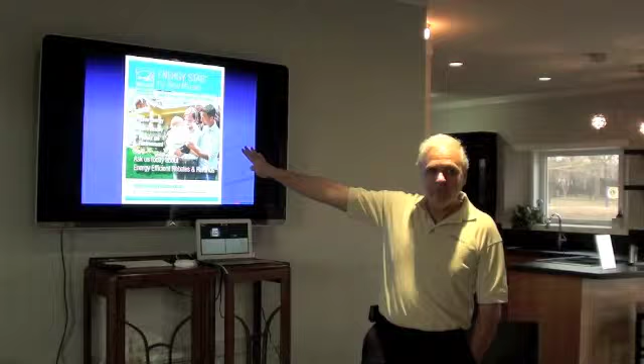We're going to talk about a few of the energy rating programs that are available throughout Canada, but more specifically in Saskatchewan. And what we're going to be talking about is the involvement of the federal and provincial government, and how they rate houses, how they audit the files, how they audit houses. The Sunridge Group is involved both in the retrofit area, retrofitting existing houses, but we're also involved in the new home side of things, and there's 3 different programs for new homes, which is what we're going to talk about tonight.

Later in May, there's going to be another session on the retrofit programs that are out there, so there'll be additional things that are going to concentrate on that. So if you've got an existing house and you want to bring it up to whatever levels you want, whether it be the equilibrium level, or just reducing energy bills, we'll talk about the programs and the incentives that are out there, and possibly by that point in time the election will be over and we'll know a little bit more about what the federal government is going to do in that vein. So we'll leave that open-ended for the time being.

About 10 or 20 years ago, the federal government, Natural Resources Canada, came up with the ERS system, the EnerGuide Rating System. That system is applicable to all types of housing, whether it's existing houses or new houses, and it rates houses on a scale from 0 to 100. Just because it's 0 to 100, it's not like grades in a school where 80% is good and 50% is failing. A very highly efficient new home would rate about 80 on that rating scale.

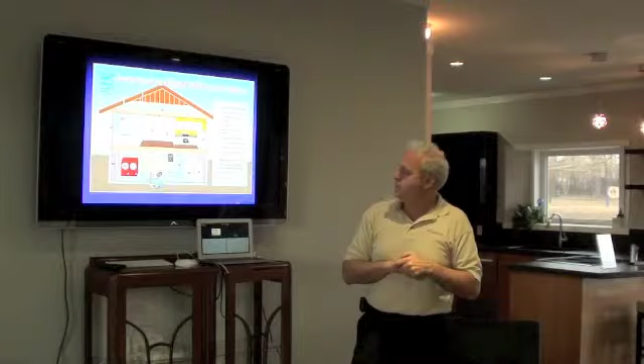Traditional housing typically has exhaust-only fans for ventilation. So they simply come on and they exhaust the stale air and they don't bring in any other air, and it's simply natural leakage where it leaks in all over the place and it's just a dead loss. So that's the heat recovery ventilator, and that typically is located in the basement. They are nice and quiet so that people tend to use them a lot more.

Rather than regular exhaust fans, most of us have the experience with exhaust-only fans in the bathroom. They don't move a lot of air, but they make a lot of noise. They're annoying, so people tend not to use them very much, and most of our homes are under-ventilated. Existing houses I'm talking about now. To retrofit an existing house with an HRV is not very easy, but to put it in a new house in the first place makes a whole lot of sense and is the right thing to be doing, because it's a very efficient and effective ventilation system with heat recovery as well.

The second item that's showing up on here is number 2, and that's the heating system. And again, if we look at a natural gas furnace, that's what most houses in Saskatchewan have, the condensing furnace. High efficiency ones are the ones that are available now. That's about as high as you can go, and they have efficiencies anywhere from about 90 to 96%. And then you can look at some other features with staged burners and high efficiency fans on them to distribute the energy around the house and that sort of thing.

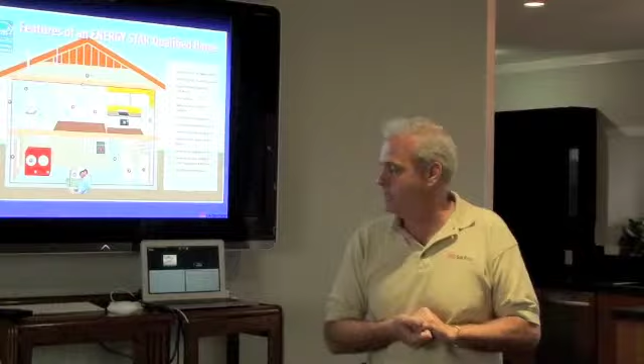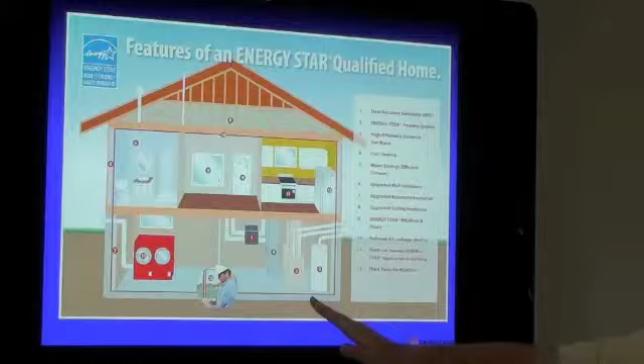This graphic here shows the water heater as being a tank style, and that's what most houses have. For the new housing programs, they need to be power vented or induced draft. That has some degree of safety to it because naturally aspirated water heaters can backdraft quite easily. If the house is under a negative pressure, the weak point is a chimney, and they can tend to backdraft and cause spillage quite easily. So induced draft or power venting are a minimum.

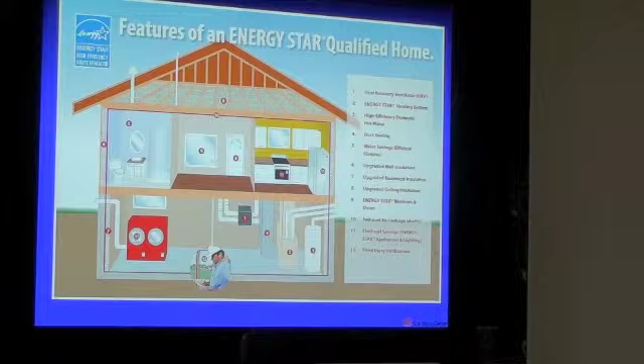Then you can also go to condensing tank water heaters. The next step up though is the tankless water heaters, and they can either be lower efficiency or condensing versions as well. And those tankless water heaters are anywhere from about 82 to about 95% efficient.

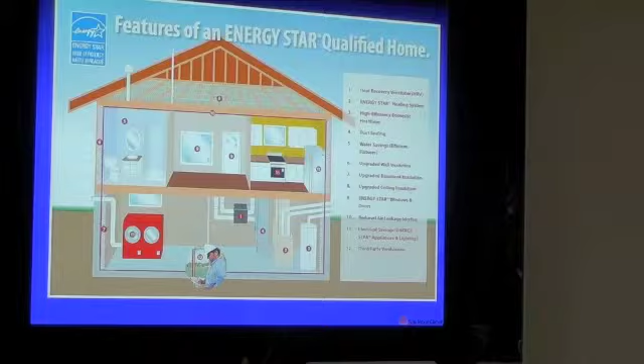Okay. Number 4 is duct sealing. Another feature of many of the new housing programs is sealing the ductwork. Most forced air heating systems have supply and return ducts throughout the house. Many of them are quite leaky, so the housing programs require that those duct joints and connections and everything be sealed so that you're not losing air. Granted, it's being in the house, but it's not getting to the areas where the energy is really needed, so they require that the ducts be sealed.

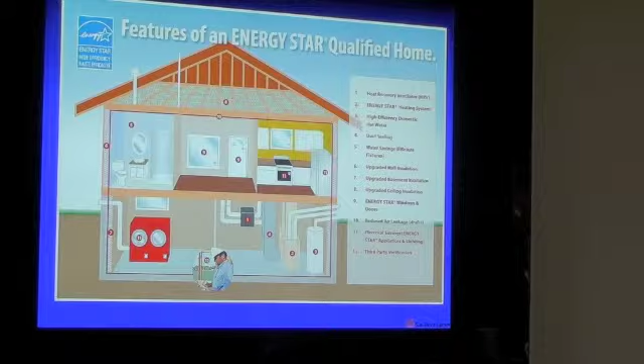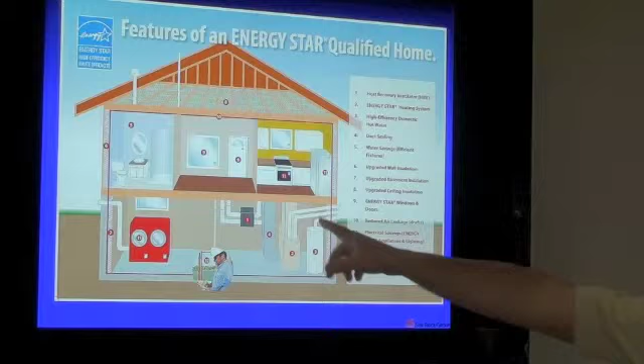The other thing is water-saving appliances. This is certainly highly recommended to reduce the heating load, but again, the less water you can use, the less impact it'll have on the domestic hot water heater.

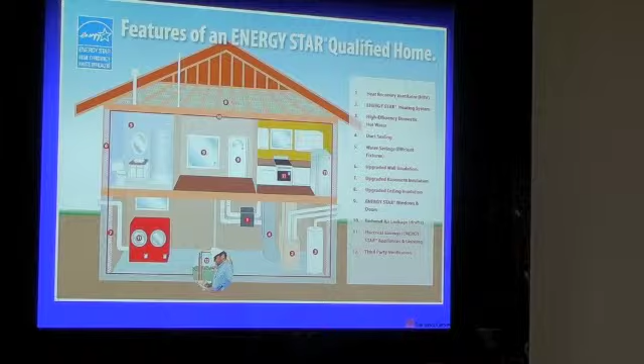Upgraded wall insulation. As I said a few minutes ago, most walls have framing members that run right through, and there's lots of what's called thermal bridging, because wood has much lower insulating value than insulation. Batt insulation has an R value of about R3 per inch, whereas wood, depending on the moisture content and the species, will have about an R1 per inch.

So if you're looking at the traditional way we frame houses in Saskatoon, 2x6 studs, 16 inches on center with R20 batts, where the insulation is, you have an R value of about an R20, but where the wood is, you have an R value of about 6. So with the percentage of wood framing that's in there, from top plates and bottom plates and jack studs and regular studs and lintels and everything else like that, potentially 20% of your wall area is framing members, which has an R value of 6.

So overall, that brings the average wall R value down considerably. Rather than being a real R value of 20, it's probably closer to 15 to 18, somewhere in that range, depending on the spacing of the studs and how you frame corners and intersections and other things like that. So it's important that the exterior walls, because they have such a large area, typically in a bungalow, 1,000, 1,500 square feet depending on the size of the house, a significant heat loss can be going through your main walls.

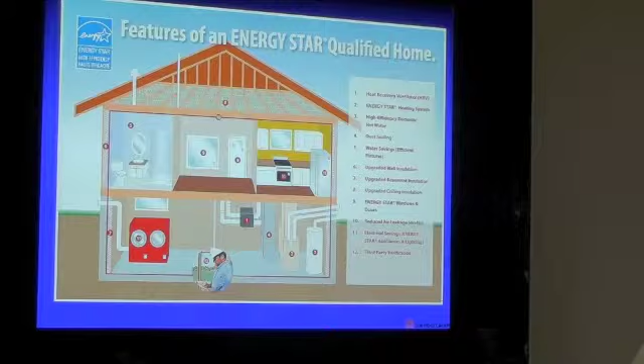Ways of doing that would be trying to eliminate the thermal bridging by putting foam insulation on the outside, strapping it horizontally so that the insulation that goes into the strapping covers the studs. You can use other non-traditional types of things like SIPs and ICF wall systems. All of those things improve the air tightness, but just as importantly, they reduce the thermal bridging because there's no direct flow of energy from inside to outside through that wall system.

Okay? Number 7 on the list here is upgraded basement wall insulation. The concept for the basement is the same as it is for the main floors. You want to try and get as much insulation as you can in there without the thermal bridging. You have a little bit more leeway with basement walls below grade because the temperature difference is not as high below grade as it is above grade. Above grade we have plus 20 on the inside to minus 40 on the outside, so our delta T, or our temperature difference, is 60 degrees Celsius in the middle of winter.

Whereas once we get below grade, that delta T goes from plus 20 inside to maybe freezing or minus 5, or whatever it is outside. The heat loss is directly proportional to the temperature difference. And so below grade, we have a little bit of extra buffering there because our temperatures are not quite so cold. So typically you wouldn't need to have quite as much insulation in your basement, but it's easy to do there because you usually have the space to do it as well. Okay?

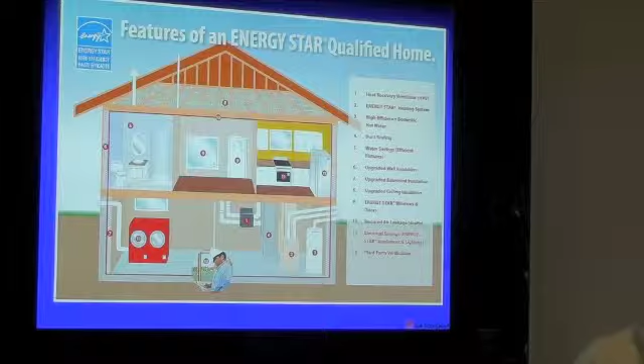Number 8 is upgraded ceiling insulation. Again, we typically see values in the R50 to R60 range. R40 used to be pretty standard 5-10 years ago. R50 and R60 is becoming much more common now. But a couple of extra things to pay attention to is the heights of the heels on the trusses, because as our roof slopes down here at the corners around the perimeter, we typically